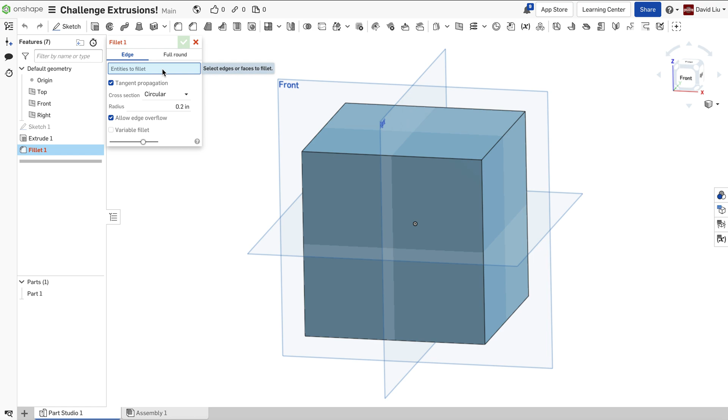It says entities to fillet, select edges or faces to fillet. I'm going to try to select an edge here and then press the check mark. So you can see here that the fillet has given me a little rounded edge, a little rounded corner here.

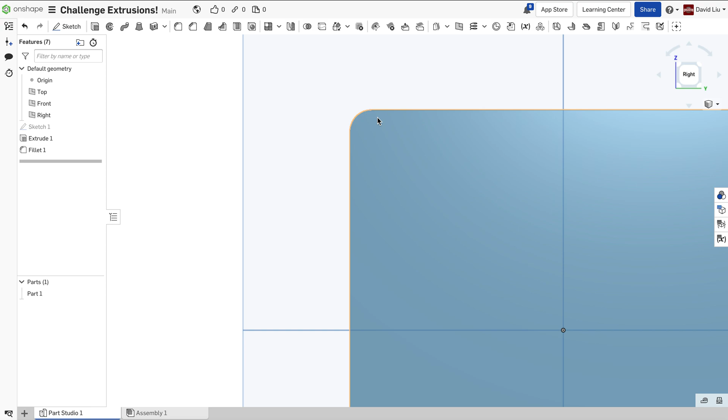The reason we really do this in design is so that when we're CADing something and giving it to the mechanical team to build it, we don't want them to cut something with such sharp edges. When they're trying to handle and grab them, even though they should be wearing gloves sometimes, and really all the time, we don't want them to get hurt from these edges. So the reason we want these little fillets is that we want them to sand it to make it rounder so they can handle it better.

So yeah, the fillet tool basically just makes the side or edges round. Obviously, when you click a side, it's like these extrusions — you can always make it deeper, make it shallower, how much you want to extrude, or make it extrude on one side or symmetrically. You can do the same thing with fillets — you can edit the fillet. You don't always have to have them at 0.2 inches radius.

Like you can see here, the current fillet right here is radius at 0.2 inches. So what does that mean, this measurement? Let me put the check mark again and let's do some measurements. So if I click this dot over here where the fillet ends on this face, and the dot over here where the fillet ends on this face...

If I click the measurement tool here, you can see that the Y distance between these two — as you can see in the two lines here, there's a line indicating the Y distance, which is 0.2 inches — means the fillet goes in 0.2 inches on this face. And the Z distance, which goes downwards, is also 0.2 inches, meaning the fillet also goes 0.2 inches on this side.

That actually makes sense because the measurement is in inches and it's a measurement of radius. The radius just means that if I draw a little circle off this little arc, I can make this circle tangent to this little arc and just continue the arc to make a circle, like my mouse is drawing right now.

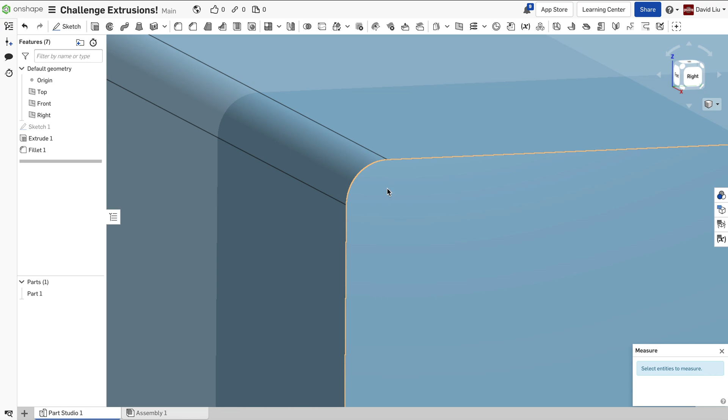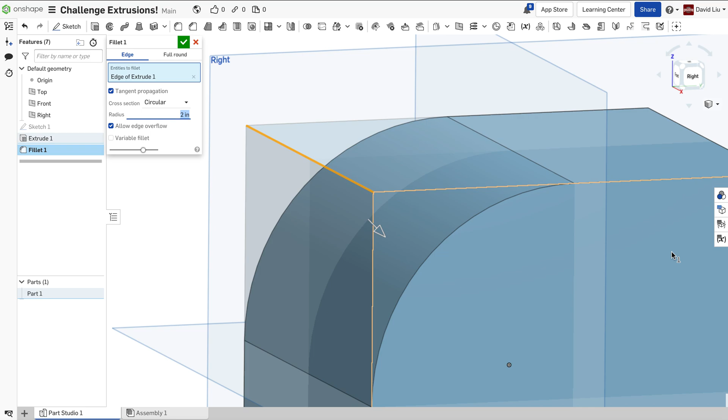If I make that circle, the radius is going to be 0.2 inches. And that makes sense because this is the radius and this is also the radius, so they're all 0.2 inches. You can also change that to something like 0.5 inches, which goes a lot more in depth into the shape. Or you can do 2 inches, which is literally half of the entire shape - it's a big curve. Probably not ever going to use that.

So the next thing we're going to talk about are chamfers. Just going to delete this. Chamfers, as you can see in the icon, are also very similar to fillets. So instead of a rounded corner, you have a chamfered, or kind of slanted, corner. You can also use this when you don't want your mechanical teammates to handle things and get injured. So instead of the fillet, you can have this chamfer where you can put the edge straight up to the sander and sand it like that, which also prevents safety hazards like a paper cut or a wood cut.

So the same thing with chamfers - they also have a distance here, and this distance is also equal distance. So if I do 0.2 inches or 0.5 inches, and I click the check mark and measure them again, you should see that the y distance and z distance are the same again.

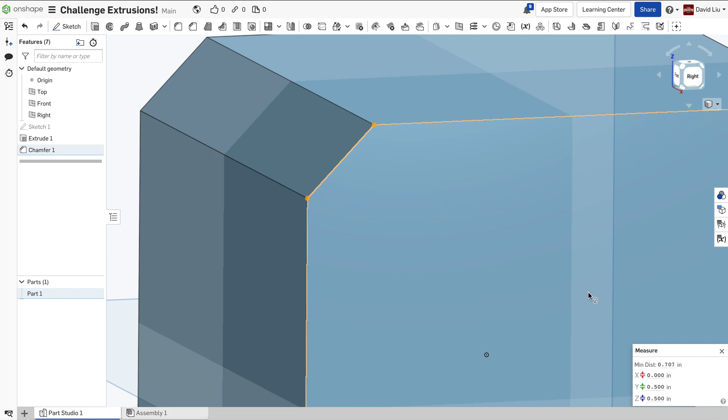However, you can edit this one because this is not a radius matter, this is a distance matter. There are two distances here - a y distance and a z distance. Currently the y distance and z distance are equal distance, so they both go in 0.5 inches on each side.

But you can change this to two distances. So distance 1, let's change this one but hold distance 2 constant. If we change this one to 1 inch, that's going to go down a lot - the z distance is going to change a lot when we change distance 1. However distance 1 changes, if you don't change distance 2, it's going to stay the same, or distance 2 is going to stay the same if you don't change that one.

So from that, you can create different types or different angles at which you can sand this. And that actually brings us to our next type of chamfer, which is distance and angle. So this distance here, you can change to 0.2, let's say. Oh, but currently it's 45.

Okay, so if I just keep this distance constant and change this angle to 60, or let's say 70, or 75, this distance - the z distance right here - never changes when you change the angle, because this one is always constant unless we change the distance.

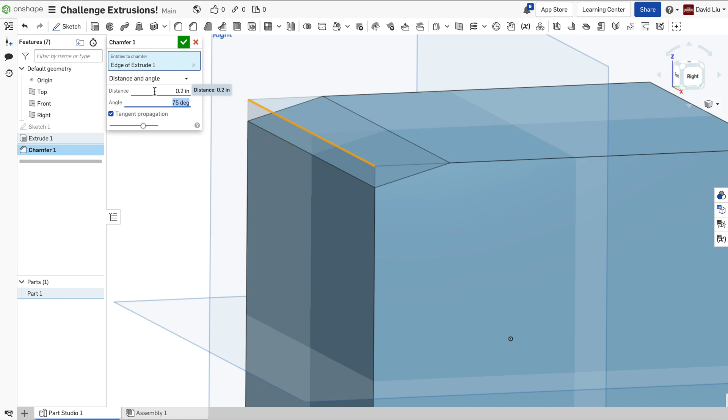So if I change this back to 45 degrees - actually let me just do 30 degrees to show you what happens when I change the distance. So the distance can be 0.5, and this goes down with the angle, but this also increases because the angle is constant. It's not two distances.

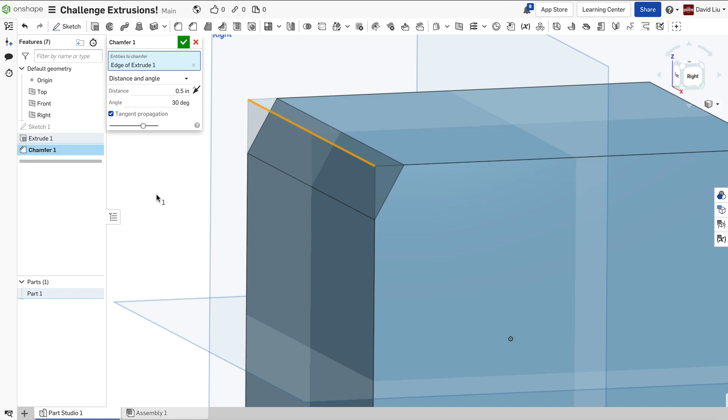So yeah, those are all the ways that you can use chamfer to make these small cuts in your extrusion to edit them, and it's a very useful tool. I'll see you guys in the next one. The next video, we're going to be learning about something even fancier called lofts, and maybe even splines or sweeps.